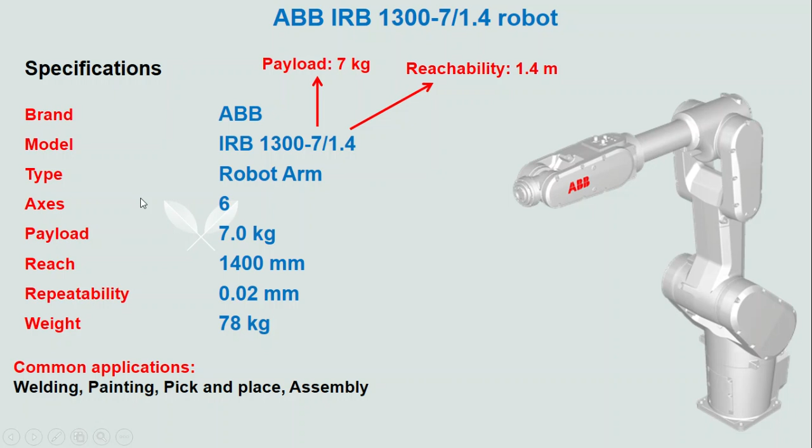In this project, besides the industrial robot arm, we want to have one tool. The name of the tool is welding gun. The welding gun is attached to the flange of the robot. The weight of this welding gun is about 3 kg.

You should be able to use these tools with any arm having a payload greater than 3 kg. In this project we are using the IRB 1300 model, and the payload for this type of robot is 7 kg, so this robot is suitable, and we can attach the welding gun to the flange of the industrial robot arm.

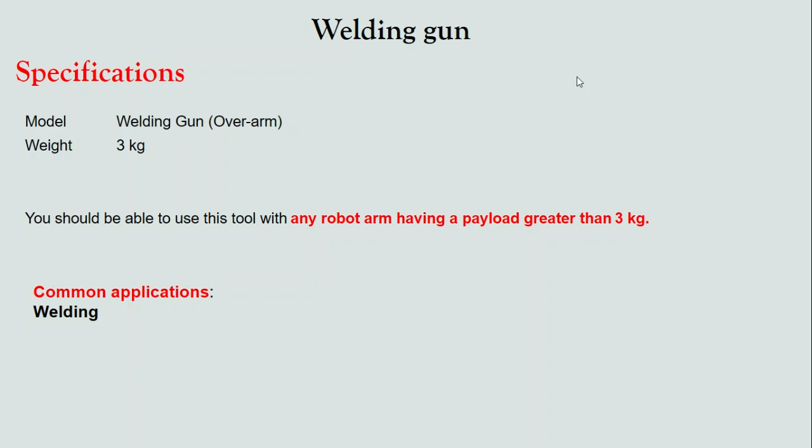In this slide, as you can see, I separated 4 steps to do this project. First step is to choose components in the RoboDK software: the ABB IRB 1300 robot, the welding gun, and test plates.

We want to use 2 test plates in this project. As you can see in this slide, we need to have the ABB robot pick and place in the RoboDK software and attach the welding gun to the flange of the robot.

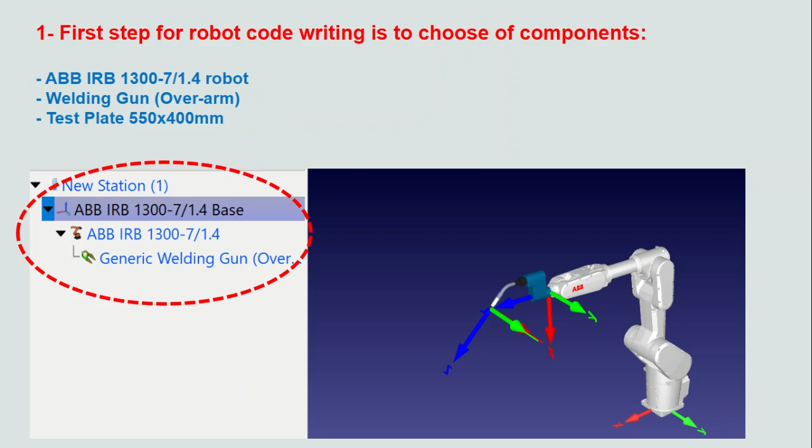Then after that, we need to create two frameworks: framework number 2 and framework number 3. In framework number 2, we put one RoboDK test plate, and in framework number 3, we put the other test plate.

So for each framework, we put 2 test plates, and then we want to have a welding between the 2 plates done by the industrial robot arm and welding gun.

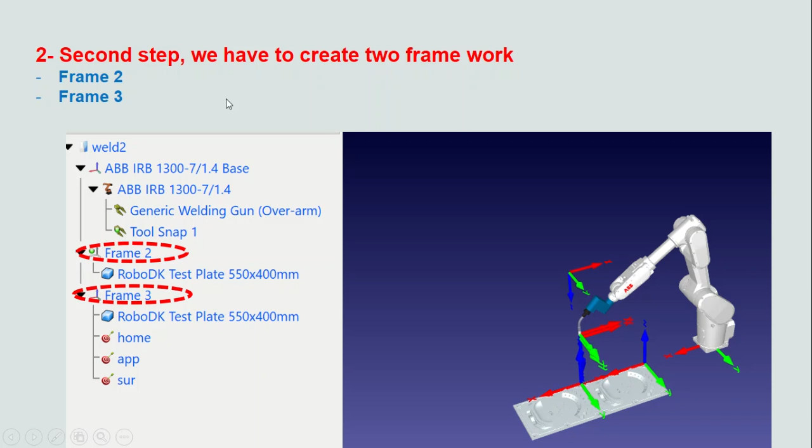In the third step, we have to create targets. After creating a framework, for each framework we need to put some targets. For example, the robot is in the home, approach, and surface position. We need a home target, approach target, and surface position in framework 3.

In framework 2, we need target number 1, target number 2, and target number 3 for welding points, so we have 3 welding points created in frame number 2. And in frame number 3, we have 3 positions: home position, approach position, and surface position or target.

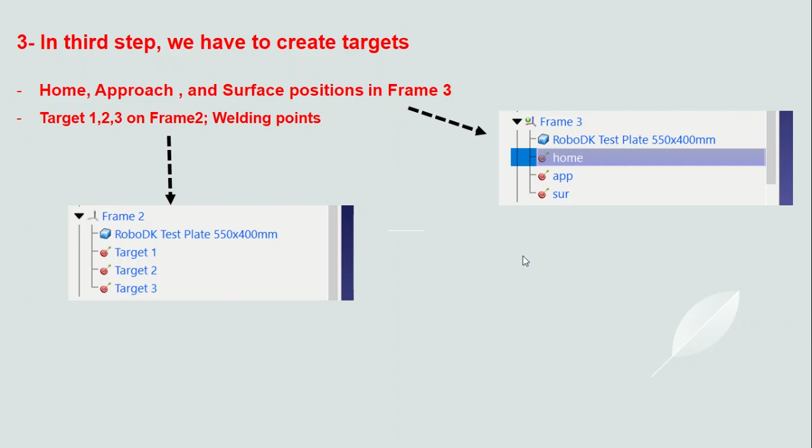After creating the targets in the two different frameworks, framework number 2 and framework number 3, the last step is to create a program and code for welding the 2 plates.

In this project, we are going to create 3 programs. The first program is about motion from home target to surface target. The robot should move from the home target, next to the approach target, and last to the surface target. After that we create program number 2.

Program number 2 is the welding program: with 3 points in this program, the robot moves through these 3 points and performs welding. After welding is finished, the robot wants to go back to the approach position, so program number 3 is created, and the robot can return to the approach target to finish the program.

So these are the 4 steps we need to complete this project and finish the robot code writing.

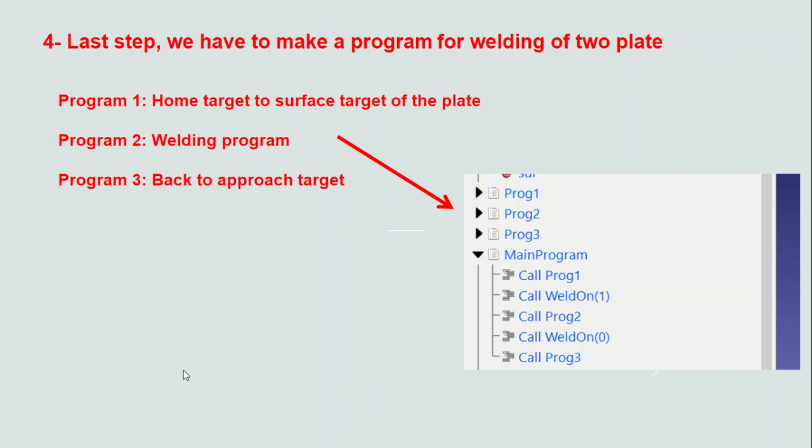Okay, great. Let's go to the RoboDK software. A new station is created, and then go back to the slide. As we remember, the first step is to choose a component: the IRB robot, welding gun, and test plate. We need to find these in the online library.

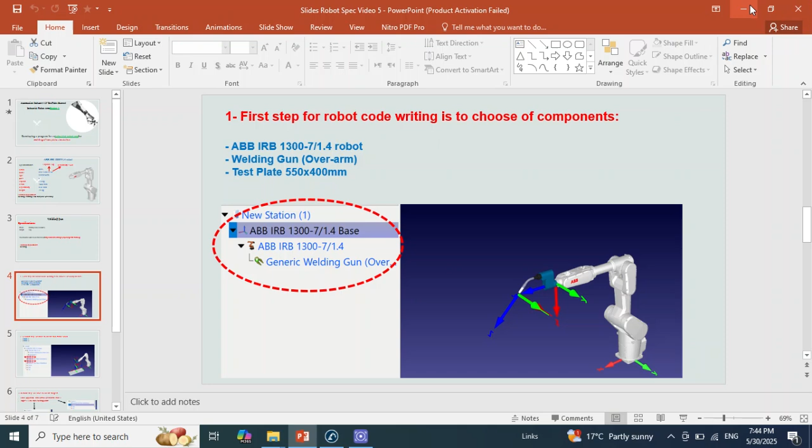Click on the online library, search for the component, and pick and place it in the RoboDK software. The first option is the IRB 1300. We have 3 types of models of the robot here.

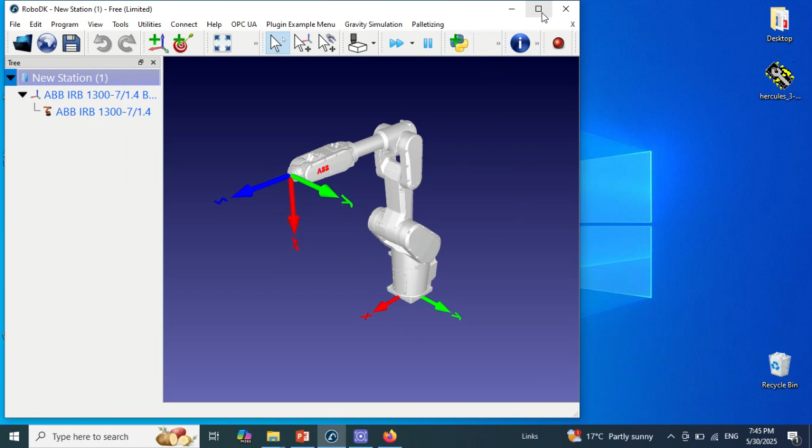The first one is IRB 1300 7/1.4. We need to download this robot, double click on it, and drag and drop it in the RoboDK software. Double click here, and the robot appears. Okay, great. Next option, next component.

Again, go to the online library and search for welding gun or weld gun. As you can see, we have different types of welding guns. Our scope is to use this type of welding gun, as we remember from the slide that this component is suitable for this project.

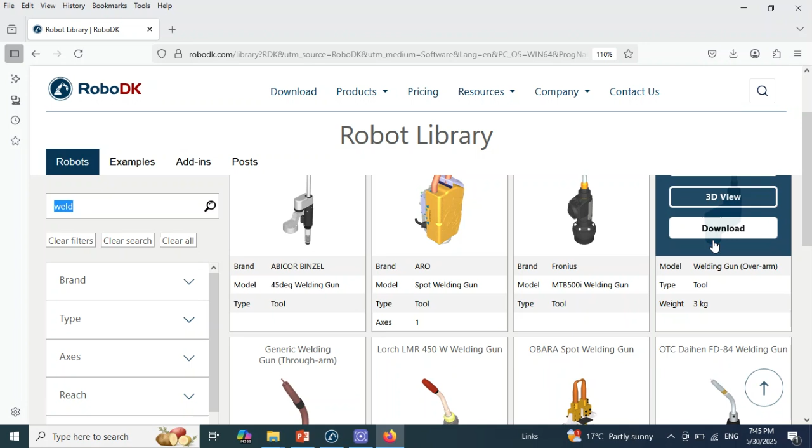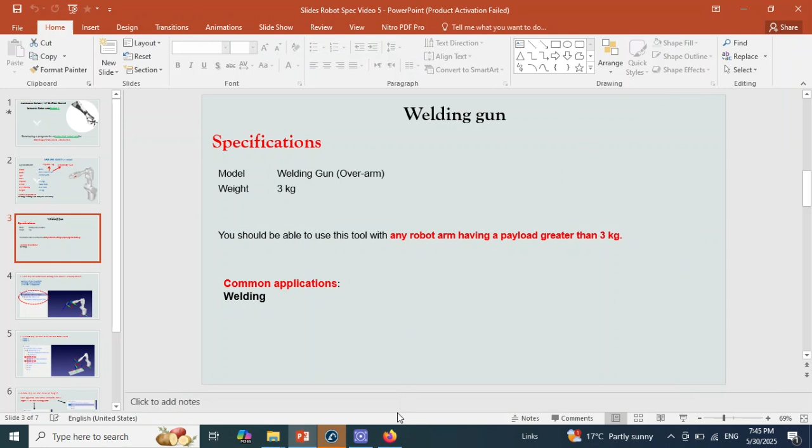Generic welding gun - download the generic welding gun over arm. The weight is 3 kg. Download it, double click on it, and in RoboDK the welding gun is attached to the flange of the robot. So now we have both components, the industrial robot arm and welding gun, in the RoboDK software environment.

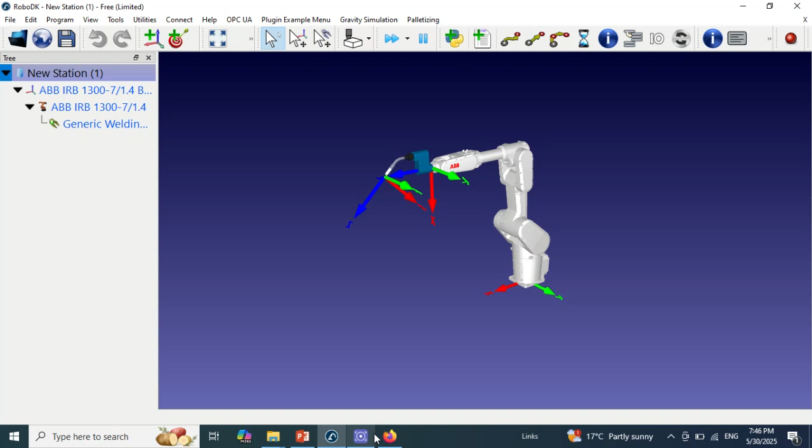After that, we need to find the test plate or testing plate, yes it is. We need to have 2 of this component. Download it, then double click on it or drag and drop it in the RoboDK software. Double click on that, and the component appears here.

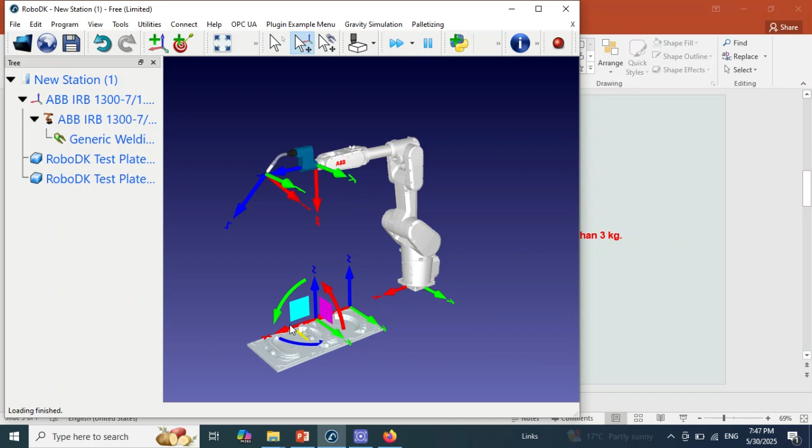Use Alt and move the robot or component a little to appear better. Next step, we need the other one - double click again and the component appears here. Let's move it a little. Now we have 2 components: 2 test plates, 1 industrial robot arm, and the welding gun appears here.

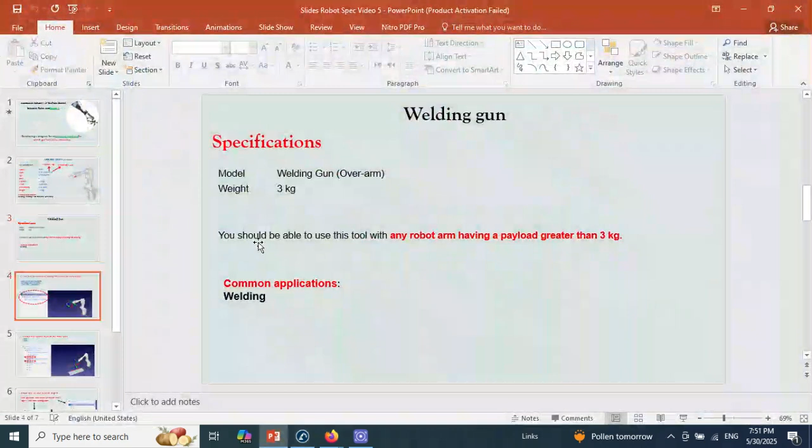Okay, after choosing the components and placing them in RoboDK software, the next step is to create a framework. We need to have two, as we remember, in step 2 we create two frameworks: framework number 2 and framework number 3. Click here to create a framework.

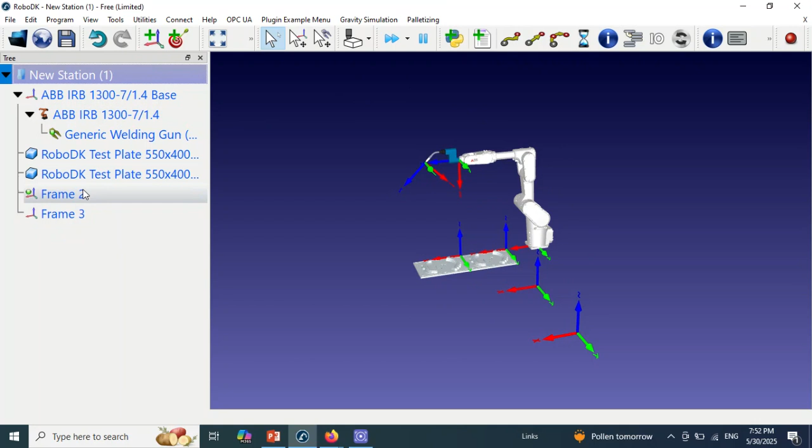Sorry, Control Z. Click here and create framework number 2, and again framework number 3, and drag and drop the test plate - one under framework number 2, the other under framework number 3. So we have two frameworks, and we put a plate on each. Next step is to reset each framework.

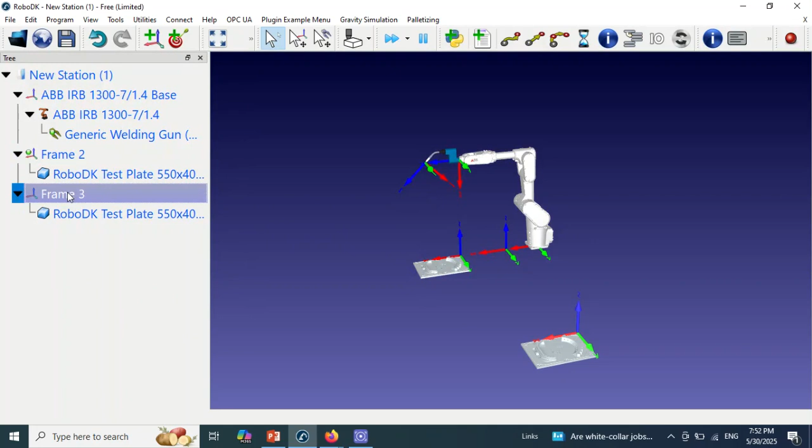Right click and find reset here, reset framework number 2 and the component in framework number 2. Next, reset framework number 3 - right click and reset again, both components. Then we want to have a welding between the two plates.

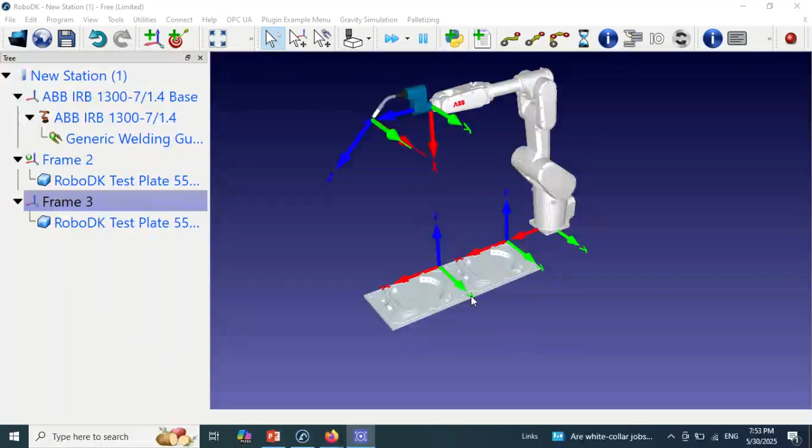So if you zoom in on the component, press Alt and move one component here, we can see some space. We need to have a very small space between the two plates for the welding point. We can see here a small space between plate number 1 and plate number 2.

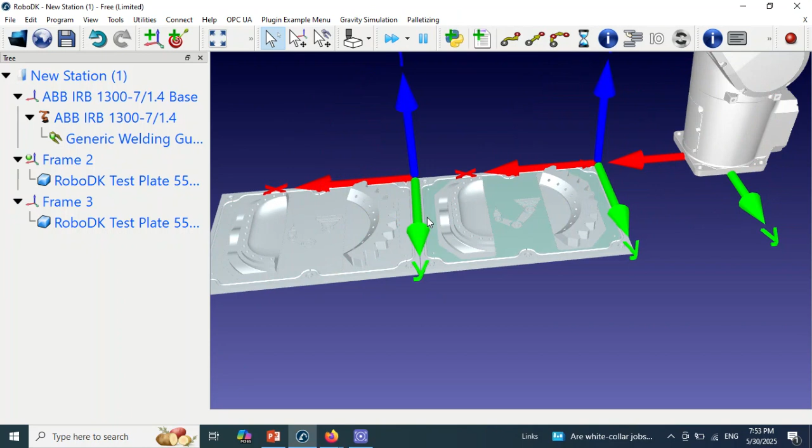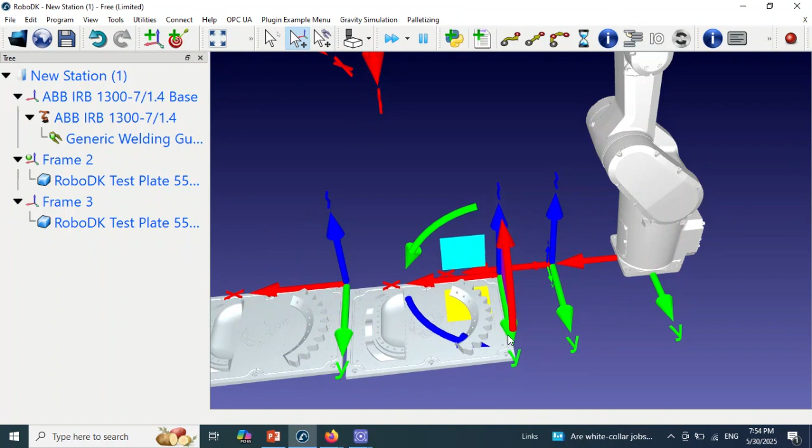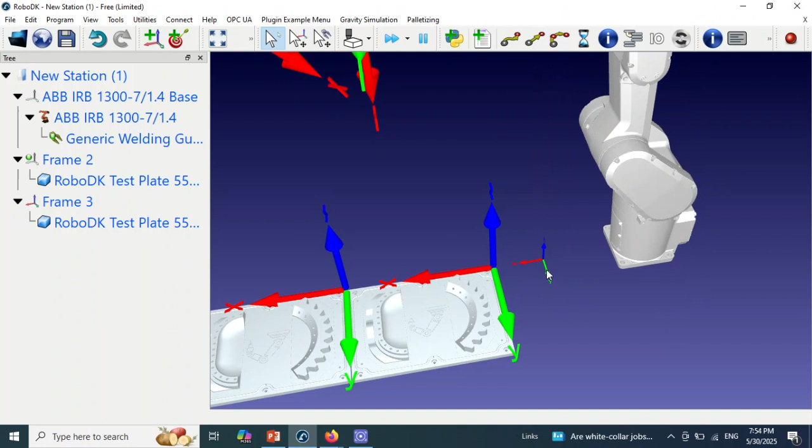Zoom in on the project, and I think it should be better to move each component a little here. Not this one. They should be very close to each other, and in each direction it should match the previous plates. This appears invisible here - visibility, click on the visibility, then click on the visibility again.

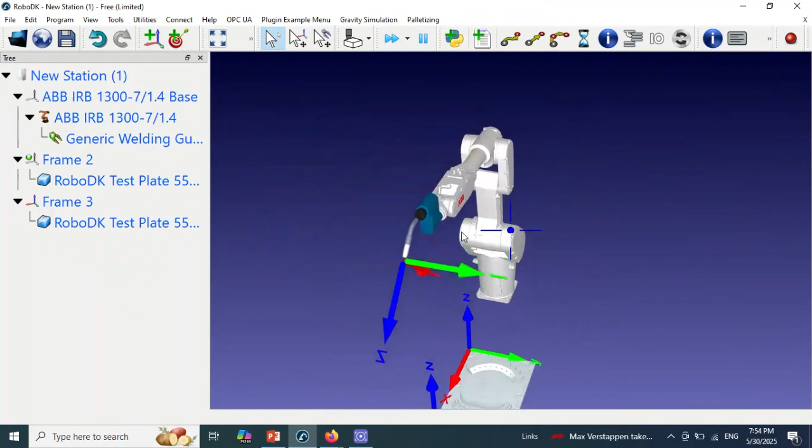Okay, I think all conditions are ready to start the program, and I want to make the robot flange invisible. I don't need to have a direction for that - it should be better to appear clear in the RoboDK software.

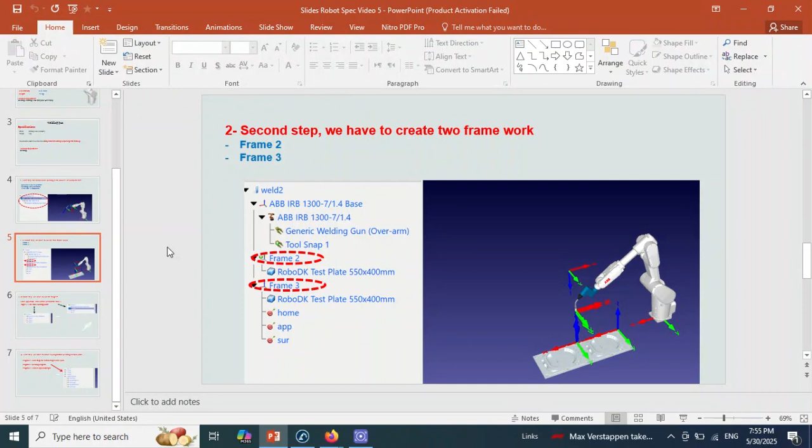Okay, save on the desktop - new station on the desktop, save the project here, and then go to the next step. So we did two steps. Let's go back to the slide - we completed step number 2, and that step is done. Next is the third step.

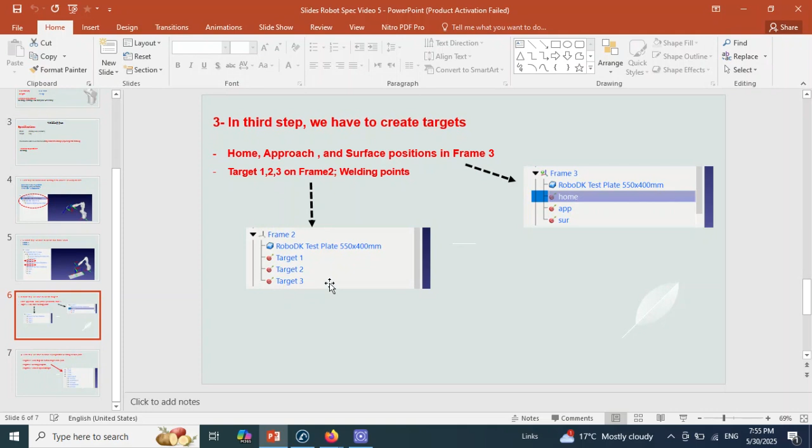We have to create targets for home, approach, and surface position - target number 1, target number 2, and target number 3. So in the third step, go back to RoboDK and create a target.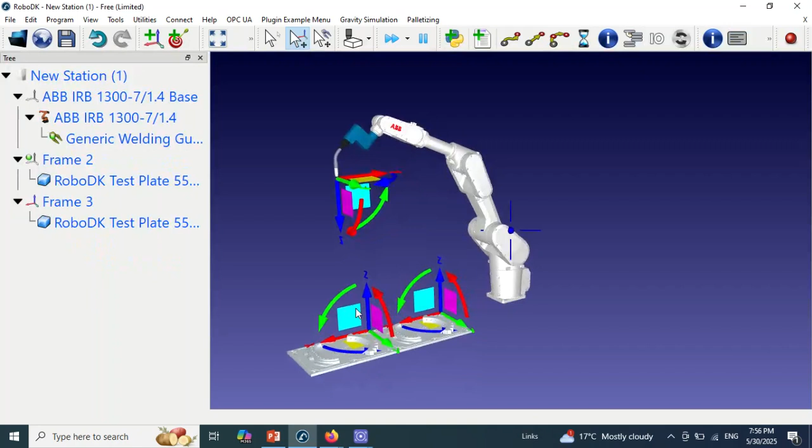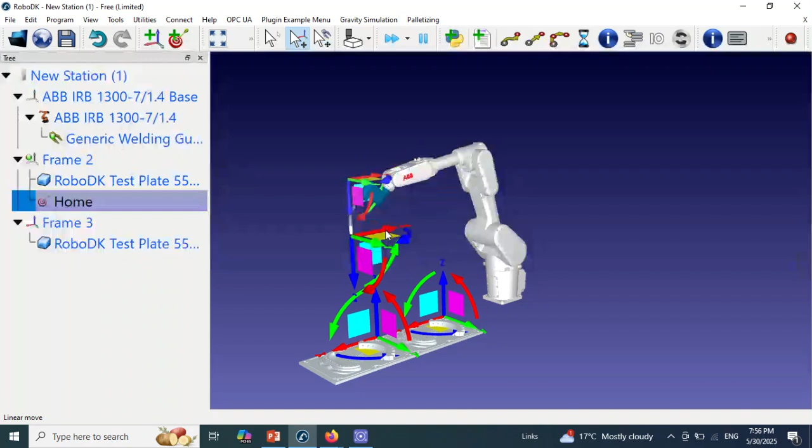First position - create the first position. Okay, this is the first position or home position. Rename it to home position. Then move a little down and a little right for the approach position.

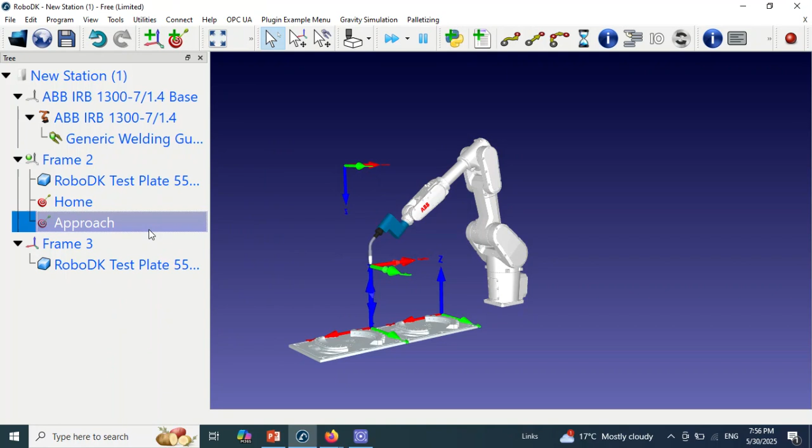Let me rotate the robot to a good position. Okay, release the Alt and target, rename it to approach. Okay, the next position is created. The last position is the surface position.

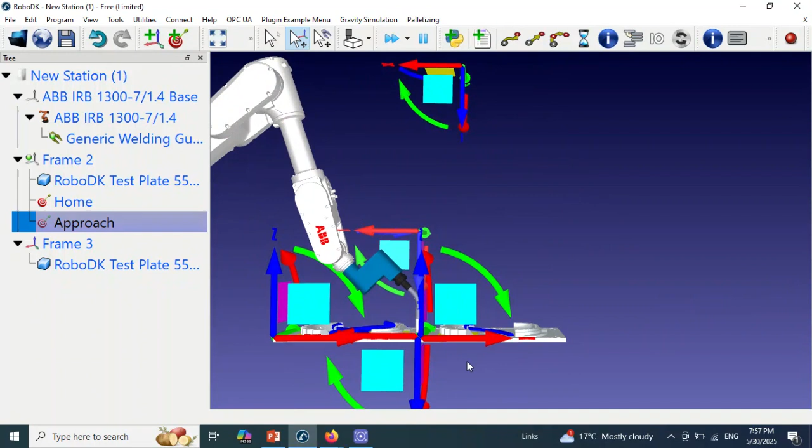Not this one, it should be exactly on the surface of the point. I think it is a good point, a welding point. It should be a little adjusted, I think it is a good point.

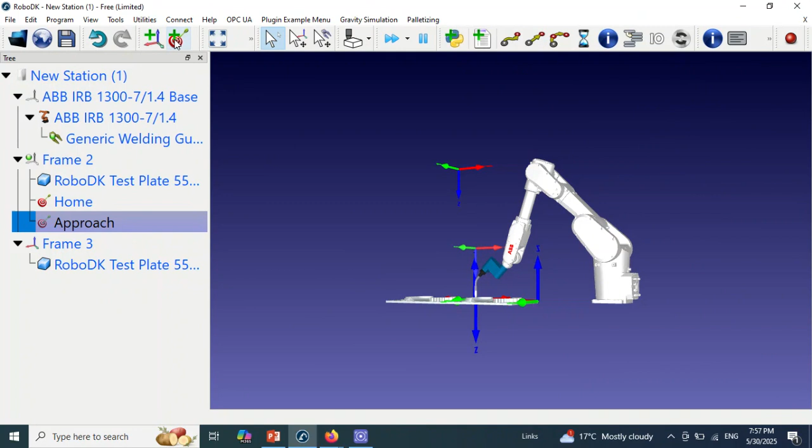Okay, next target, rename it to surface or Sur position. Okay, check the position we created before: home, approach, and surface. Okay, well done.

Next step in the framework, number 3, as we remember, is target point for welding point. So we need to have 3 targets for the welding point. We have 3 points for welding.

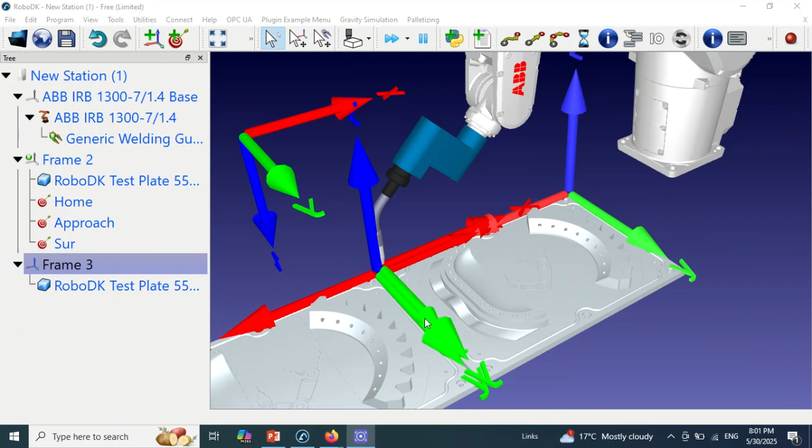So the first point I want to create in framework number 3 should be here. Let me take off the visibility of the framework and just have visibility for the robot gun, the welding gun. So we have here the first point for the welding. I want to create it here, release the Alt, and put it here.

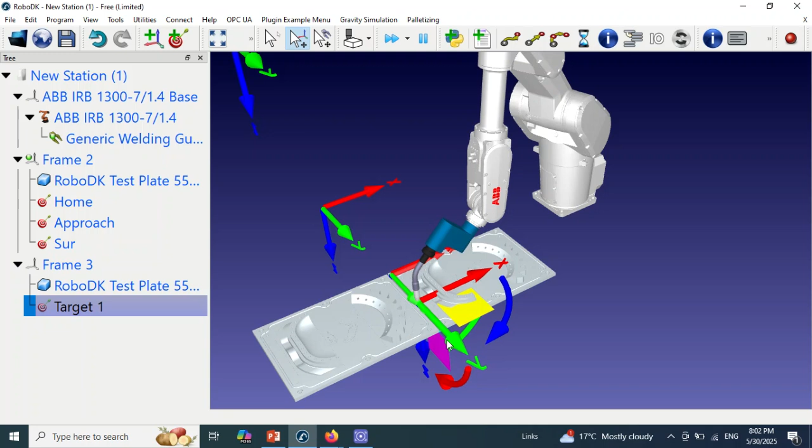Target number 1: press the Alt again and move the welding gun to the new point. Release the Alt, release the left key, and create it.

In framework number 3, I want to create target number 2. Press Alt and move the welding gun to the last point for welding. Release the Alt and release the left key.

Framework number 3: click on framework number 3 and create target number 3. Check the targets we created: target number 1, target number 2, target number 3.

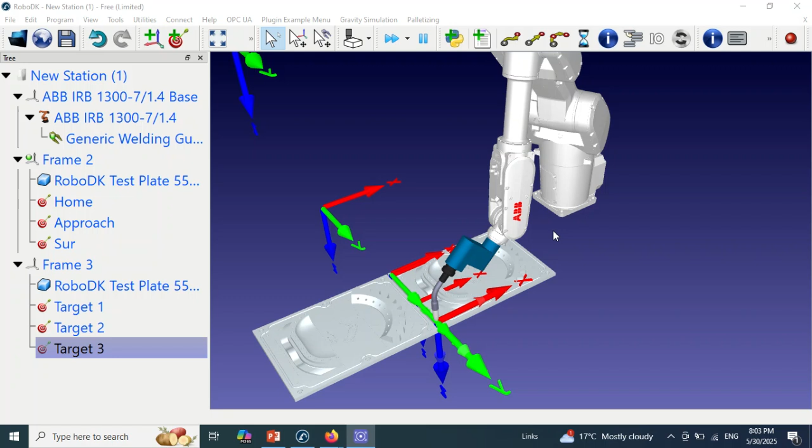Okay, great. All of the targets we need in this project are created here. Next we need to go through creating a program, the last step. Okay, last step is to create a program.

First, go to frame number 2 and click on the home position. From home position through approach and surface, we want to create program number 1, and we want to use move joint as the curve moving. So create a program here.

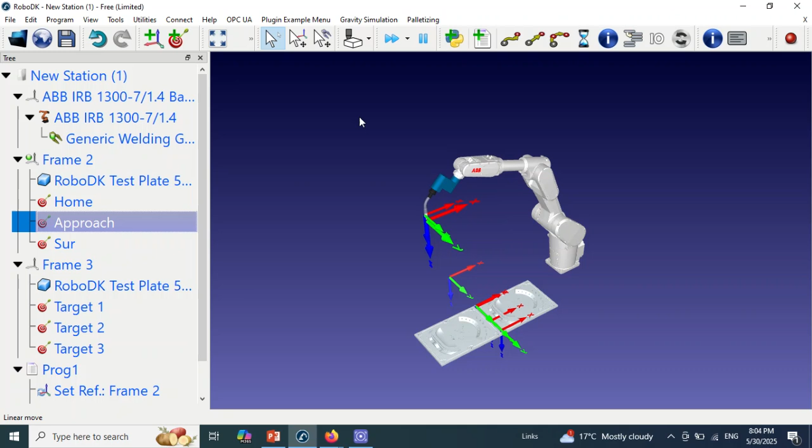Program number 1 is created. In this program: home position, move joint to the approach; approach position, move joint to the surface.

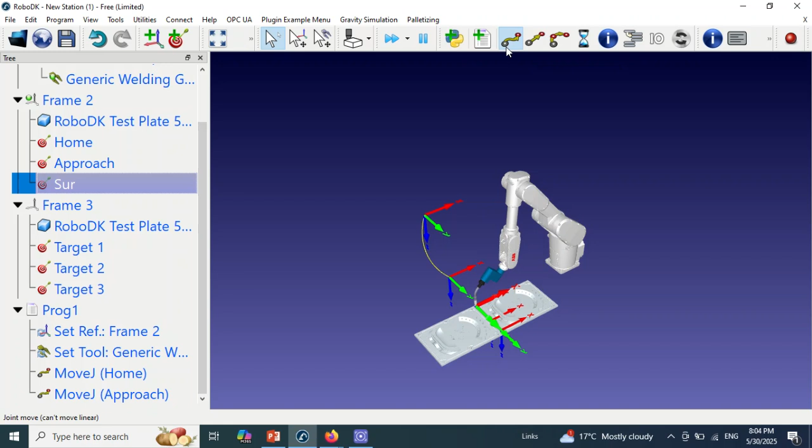Approach to surface position, again move using an instruction such as move joint. Click on the surface and click here to add a joint movement to the program. So program number 1 is created.

Let's check that. Double click on program number 1: move joint to the home position, move joint to the approach position, and then move joint to the surface position.

Double click again on program number 1: joint to the home position, joint to the approach position, joint to the surface, joint to the home, joint to the approach, joint to the surface. So program number 1 is created.

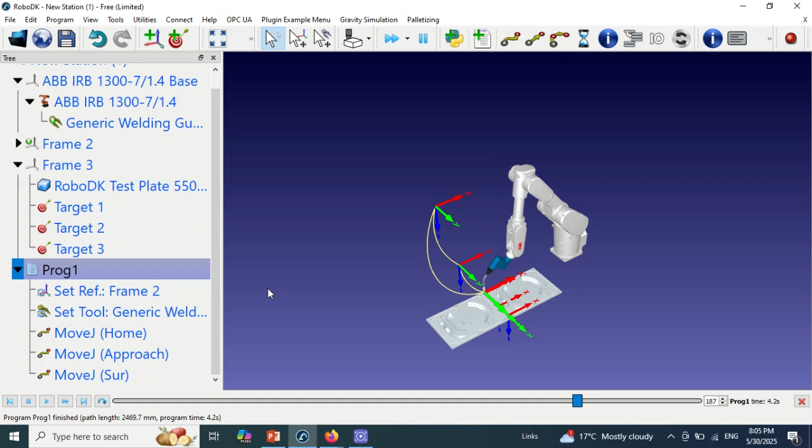Well done, good. Next step, we need to have program number 2. So click here, new program, program number 2. We want to have a program for the welding point.

For the welding point, we want to use a linear movement, or move L. So here, target number 1, program number 2, click again, control click again, and move L, or linear movement. We want to use linear movement.

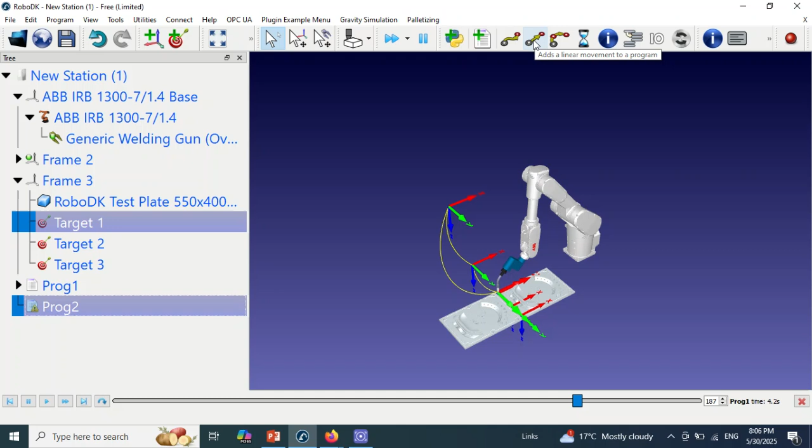Program target number 1 to target number 2, again move L, or linear movement. Target number 2 until target number 3, again move L, or linear movement. So we created...

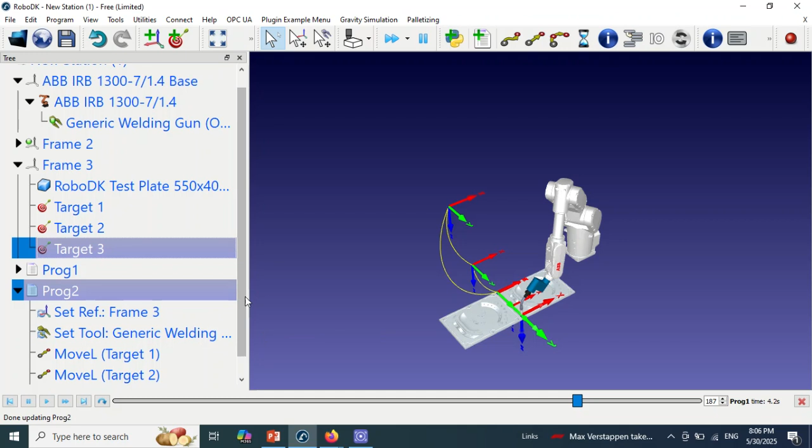Program number 2, and we want to test it again. Okay, great. You can see, double click: move target number 1, target number 2. Double click again: target number 1, target number 2, target number 3 is created.

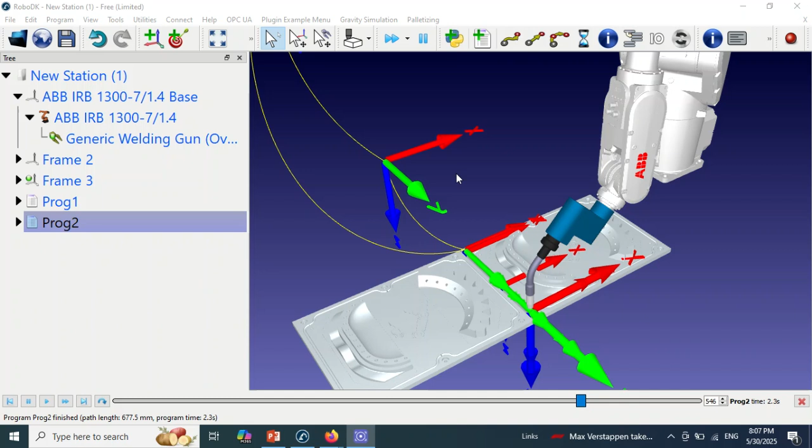So the last program we need to have in this project is to go back to the approach position. After welding is done, the robot should return to the approach position. Create again a new program, program number 3.

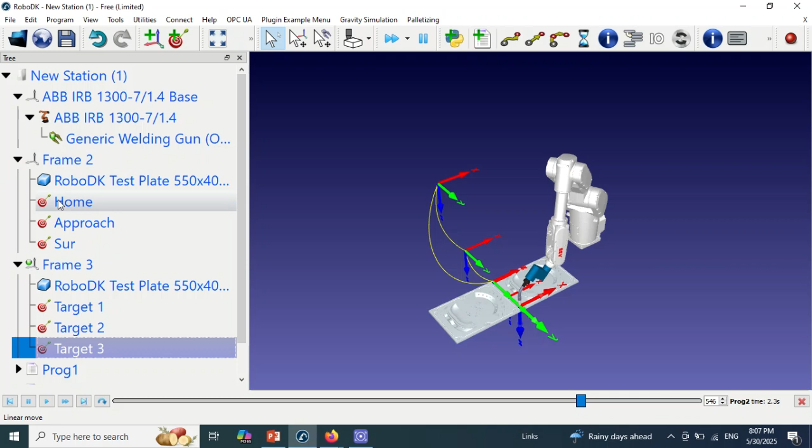In program number 3, from target number 3 to the approach position, target number 3 to approach position, we need to have a curve. So click on program number 3, control, and click to the approach, and create a move J.

This program is created. Double click on program number 1 to test the program. Program number 2, welding program. Program number 3, back to the approach position. Okay, all of the programs, I want to test again.

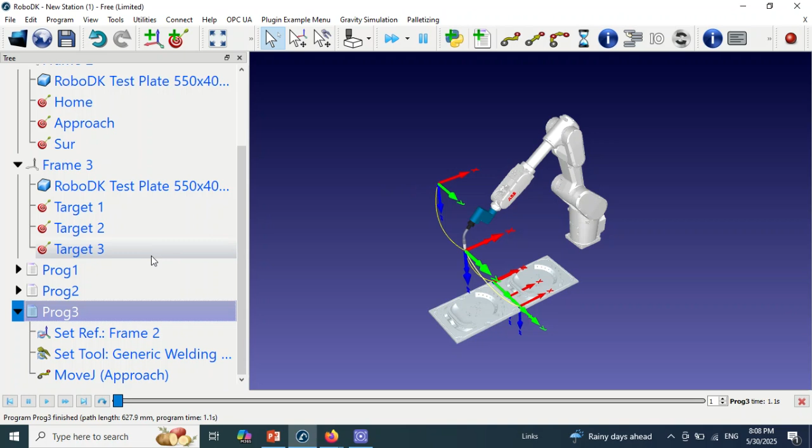Program number 1, double click on program number 1, home position, approach surface position. Program number 2, target number 1, target number 2, target number 3. Program number 3, target number 3 to approach position. All of the programs we need in this project are created here.

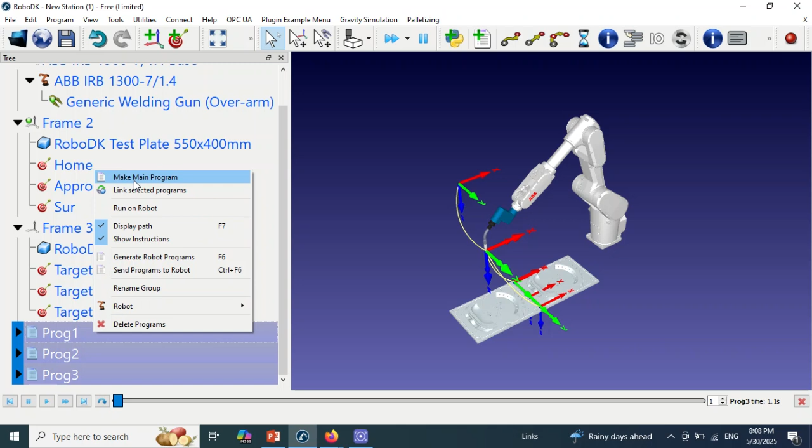So then after doing that, select all of the programs: press Control and click on each program to select all of them, right click on that and make a main program. So what happens with this option is we will have all of the programs in one program as a main program.

Program number 1, program number 2, and program number 3. So after creating a main program, all of the programs will be executed back to back. Double click on the main program. Oh, sorry, I need to create it again.

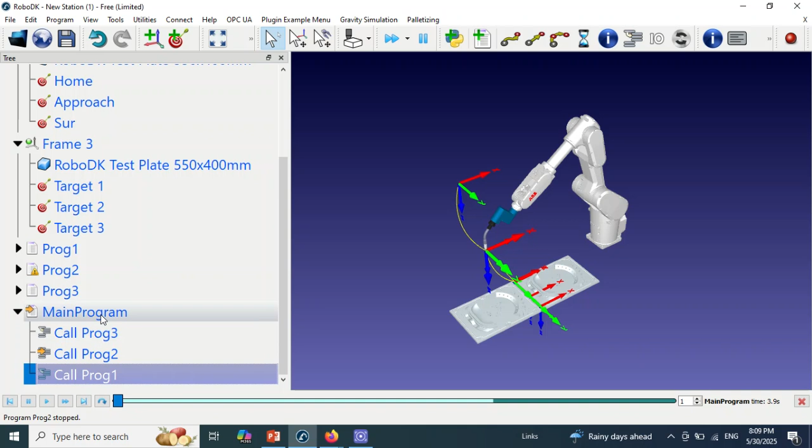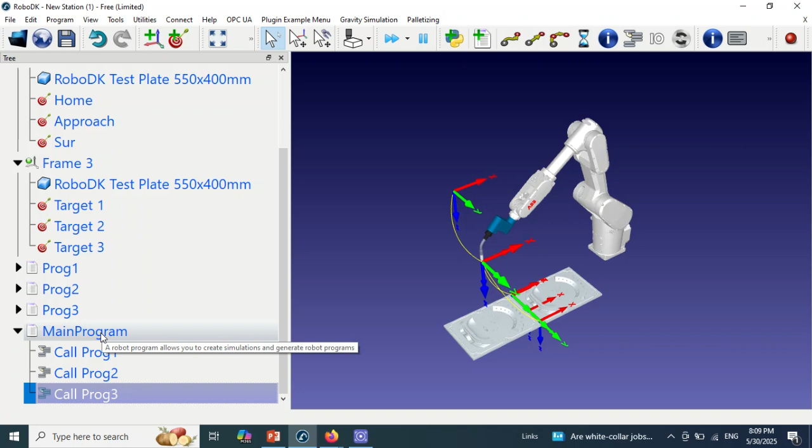Delete program number 1, program number 2, program number 3. Right click and make a main program. Yes, program number 1 will be executed first, program number 2 after that, and program number 3 after that. Double click on main program. All of the programs should run back to back.

Okay, great. Double click again, main program, program number 1, program number 2, program number 3. Okay, well done.

So in this project, one extra thing we need to do is create a welding on and welding off in program number 2. So in this step, we want to call a program to start the welding, or welding on, and to turn off the welding, we call it turn welding off. So first step, we need to find the subprogram or macro here.

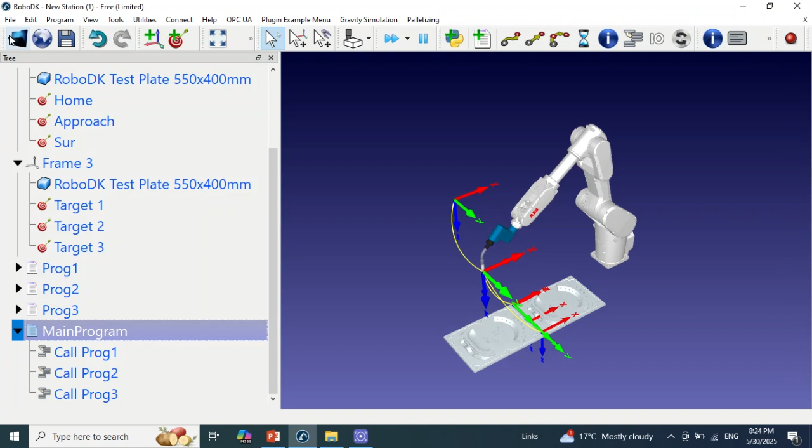If you go to the file, load file, we can find the type of macro we need in our project. RoboDK, library, macros, and then weld on and off. If you search for W, you can find weld on, which is a type of Python subprogram. We want to select this program and put it in this environment.

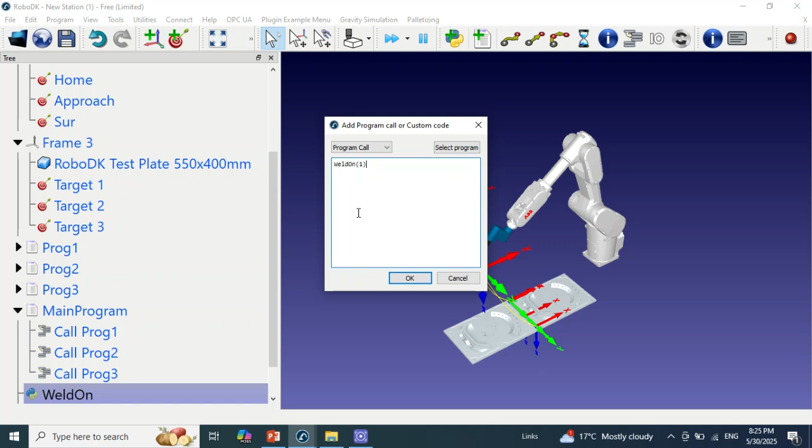Open. Weld on is created here, and then we want to call this program by clicking here, program call, select a program, weld on, select it, and if we put 1 here in the bracket, it means that welding on is created and started. So we created weld on here.

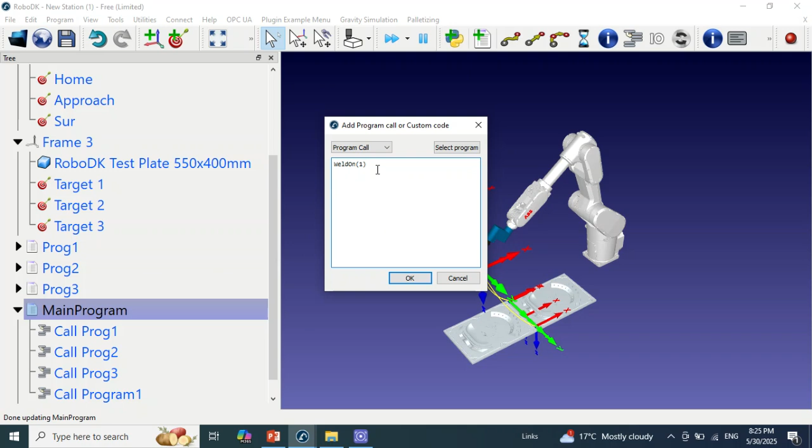Sorry, I need to create it in the main program. Call again, select a program, weld on, select, and inside the bracket 1, it means that welding on is created. It is created in the main program. So at the moment we have the other program we need to call here: double click again and select the program WeldOn, with 0 here, which means that welding should be turned off.

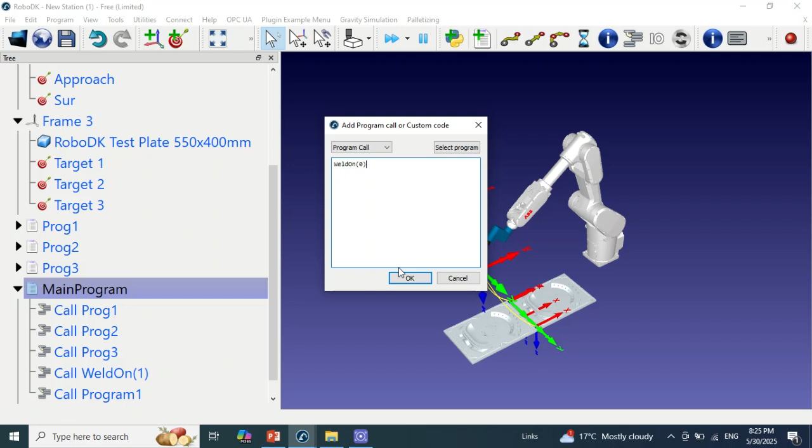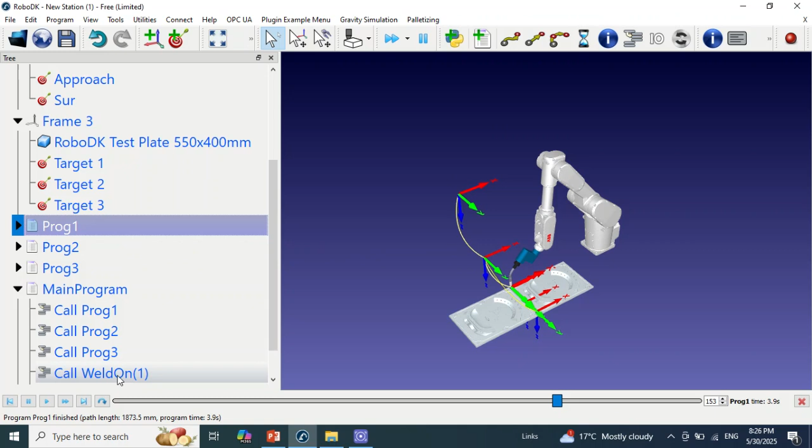So okay, both call functions are created here, and then I want to put them before or after each program where we need them. So program number 1, double click here, is going to the surface. So we need to put weld on after program number 1 and before program number 2, which as you can see here is the welding. So call welding on should be before program number 2 or after program number 1.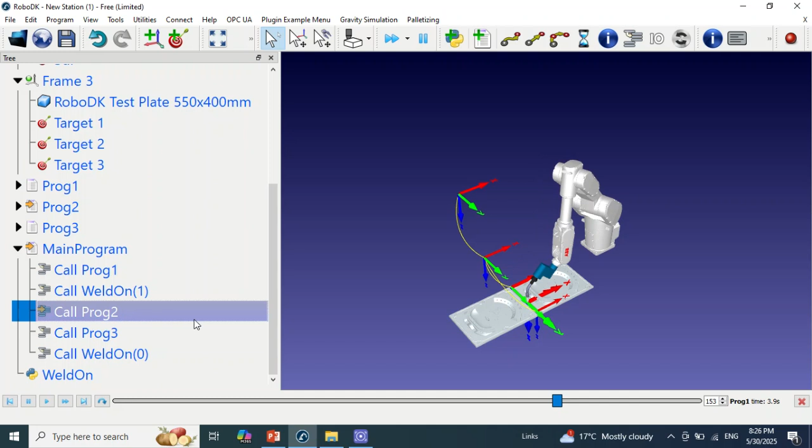I put it here. After the welding is finished at the last point, we need to turn it off. So before program number 2, welding is turned on, and after program number 2, welding is turned off.

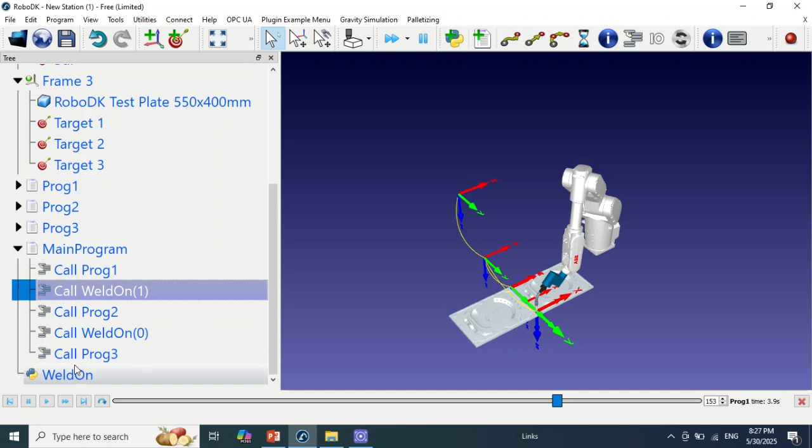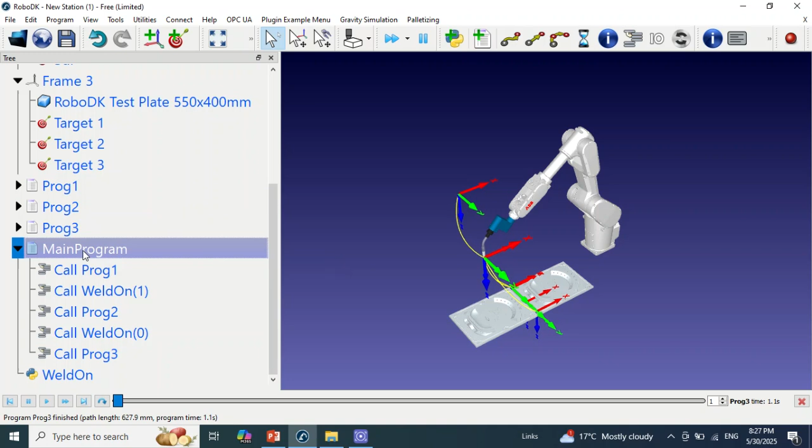So overall we have program number 1, program number 2, and program number 3 created. So main program, double click on that. As you can see here, the result: call program number 1, weld on, weld off, and back again.

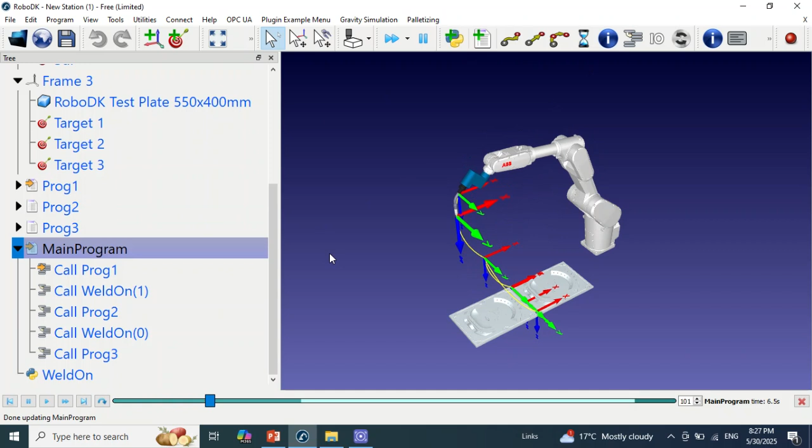So double click again, we can see the result. All of the steps are done here. Program number 1, welding on is on, call program number 2, turn weld on is 0, and call program number 3. So here again is the whole simulation, as we can see.